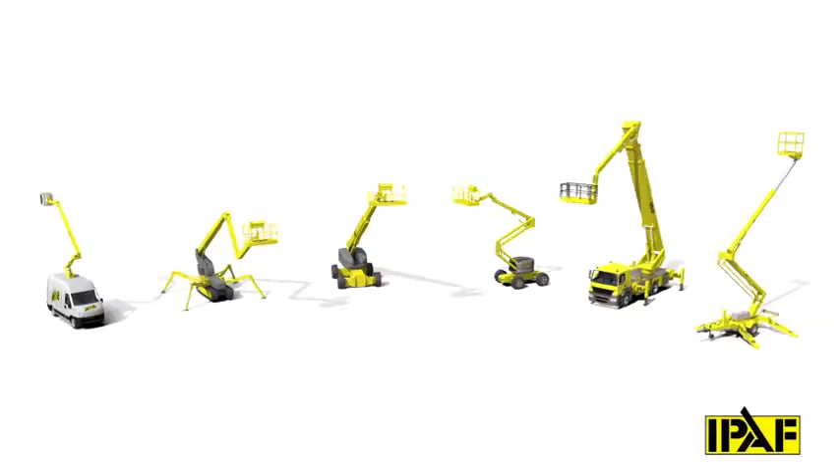This IPAF video explains how to carry out a pre-start inspection. This does not replace training and should be done by a trained operator who has either been familiarised with the unit or has been given time to self-familiarise. See the IPAF familiarisation statement and the employer-nominated person.

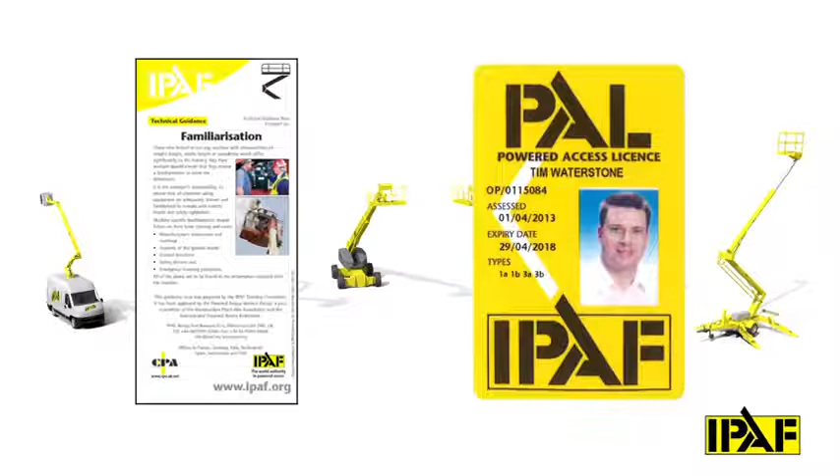All machines are different. Therefore, it is important to refer to the actual machine's operator's manual for machine specifics prior to use. The operator should be suitably dressed as per a risk assessment and/or specific site requirements. This might include the wearing of a hard hat, suitable footwear, gloves, goggles, etc.

Unless the risk assessment states otherwise, this must include personal fall protection, a full body harness and lanyard. For more information, see the IPAF harness statement at www.ipaf.org.

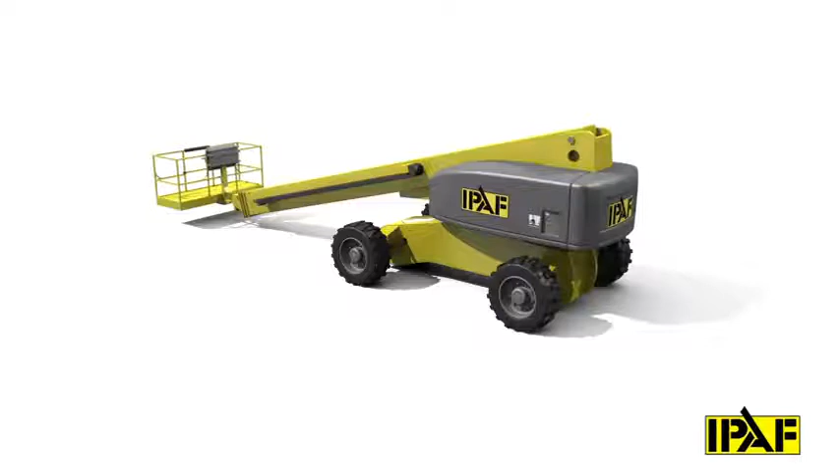Identify a safe place to do the pre-use checks away from other people, mobile machinery and vehicles, and without the risk of impact with overhead obstructions or power lines. Before work commences, only machines with proof of a current inspection should be used. Check the machine by following a logical order. There are checklists available as a reminder and instructions within the machine's operating manual.

Starting with the boom in the lowered position, working clockwise from ground controls, visually inspect the machine for damage, cracks, leaks, damaged or missing components, excessive wear and decal condition.

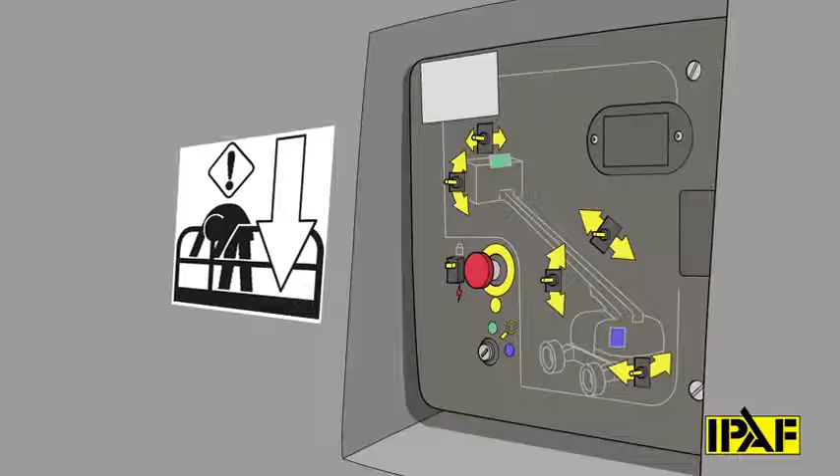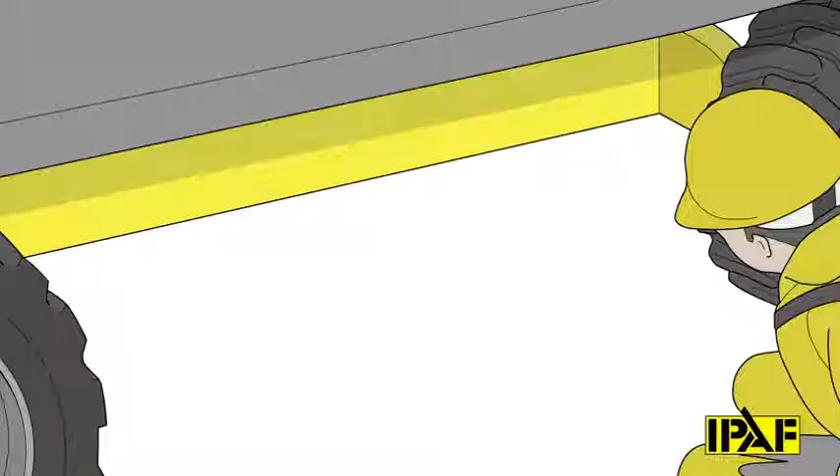Now check the machine does not function without the key. For example, this can be done by checking the key switch works and that the other controls do not work with the key in the off position or with the emergency stop in. Then, remove the key before proceeding with the inspection. Check the ground for oil under the machine. This can often be the first hint of a potential problem.

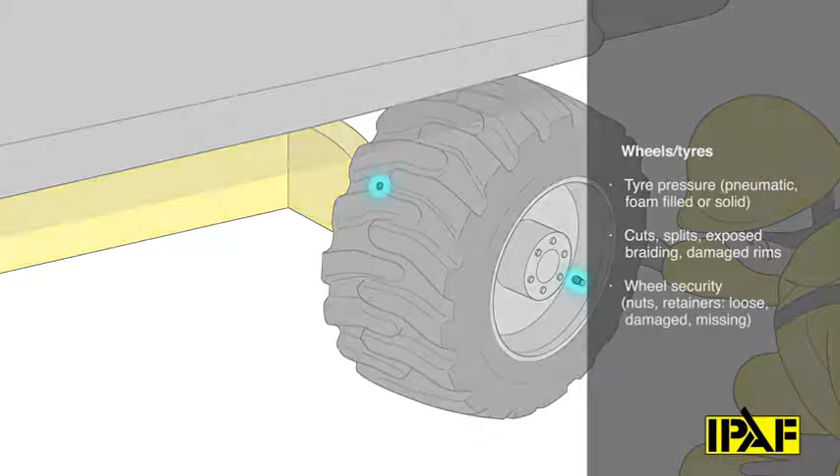Check the tyres, remembering that some solid or foam-filled tyres may have a bolt head showing opposite the valve. Check the tyre pressures on pneumatic tyres. Look for cuts, splits, exposed braiding and damage to tread or tyre wall. Look for cracked or damaged rims.

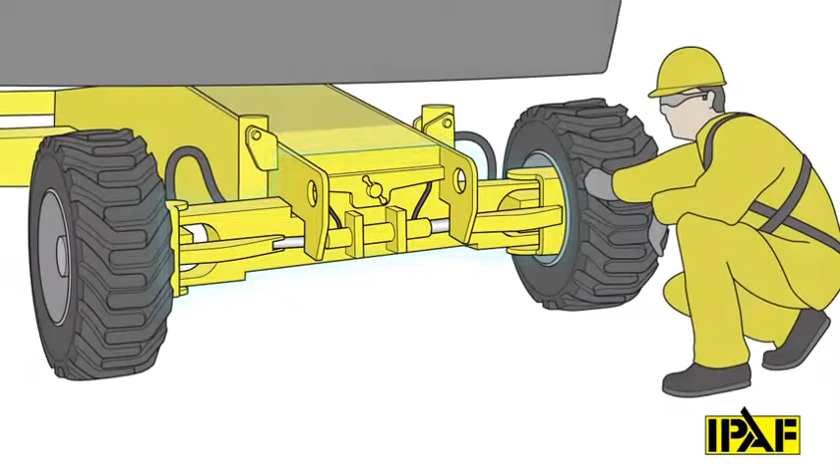Check wheel security by looking for loose, damaged or missing nuts or retainers. There should be no leaking either side of the wheel hub. Check for loose or bent components, pins and fasteners. Check wheel alignment and look for evidence of the wheels having been left in crab, four-wheel steer or two-wheel steer mode.

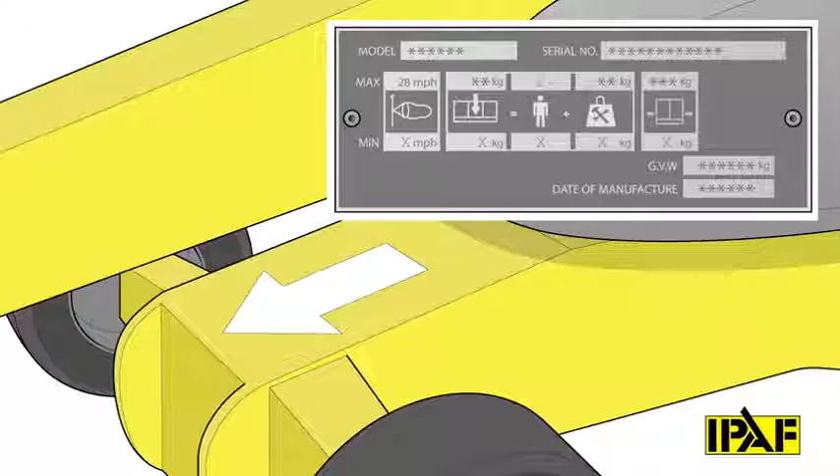Check the slew ring for missing teeth or damage and for excessive movement of boom. Also, has the slew lock been left engaged? Check the chassis decals and plate for important information, warnings and directional arrows. Ensure catches and hinges are functioning properly when raised and secure when closed.

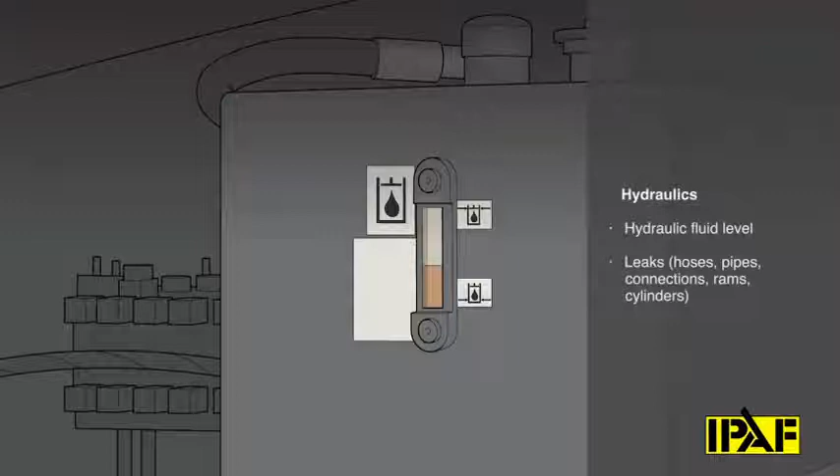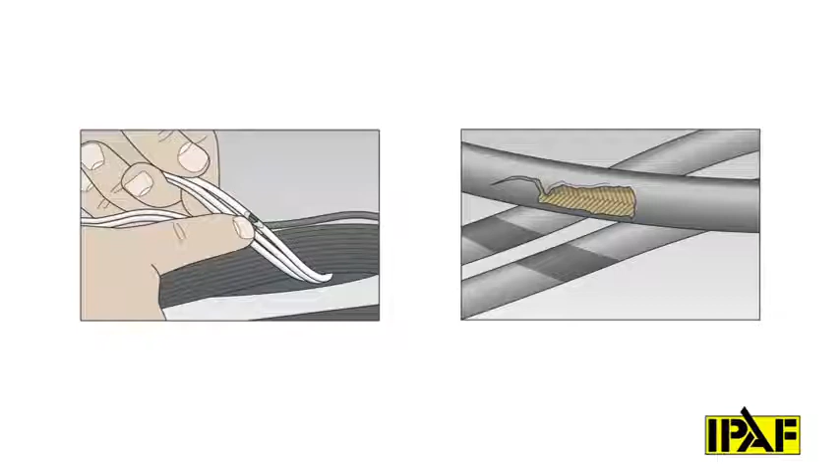Check the fuel level is sufficient for the day. Check the hydraulic oil level. When you do this, you must make sure that the boom is fully stowed. Visually check the hydraulic manifold for leaks. Check for loose, damaged or exposed wires. Check for damaged or leaking hoses.

If there is a slope warning device fitted and accessible, insert the key, turn to the ground controls and pull the stop out. Check this device for full free movement and function. Then remove the key and re-engage the stop.

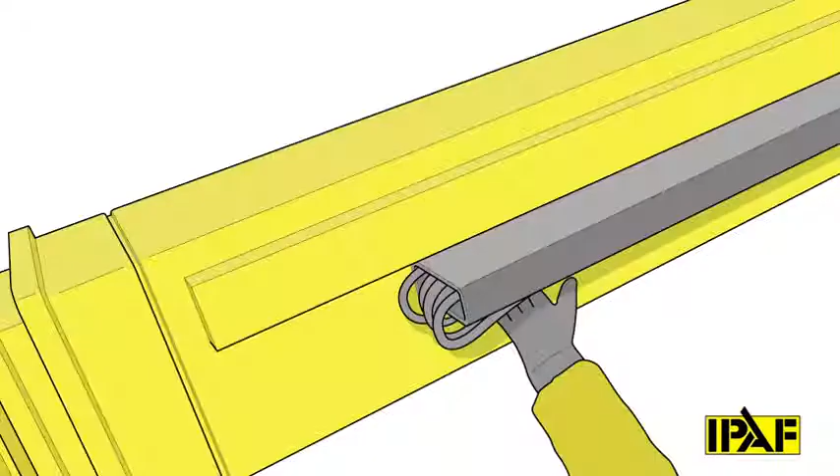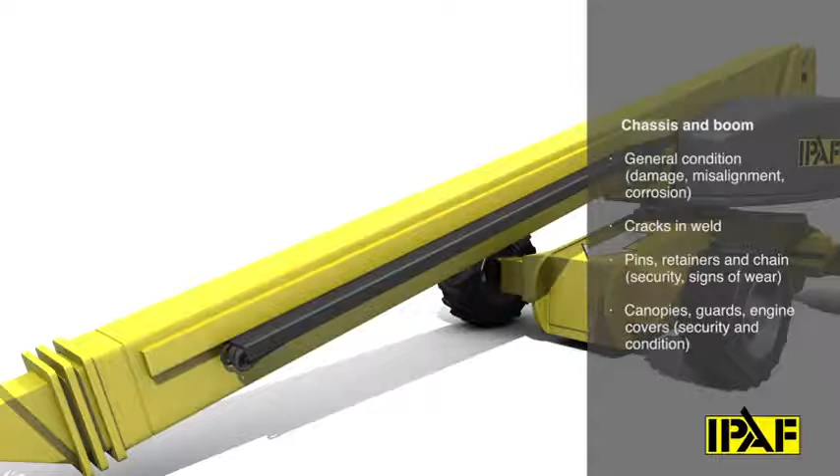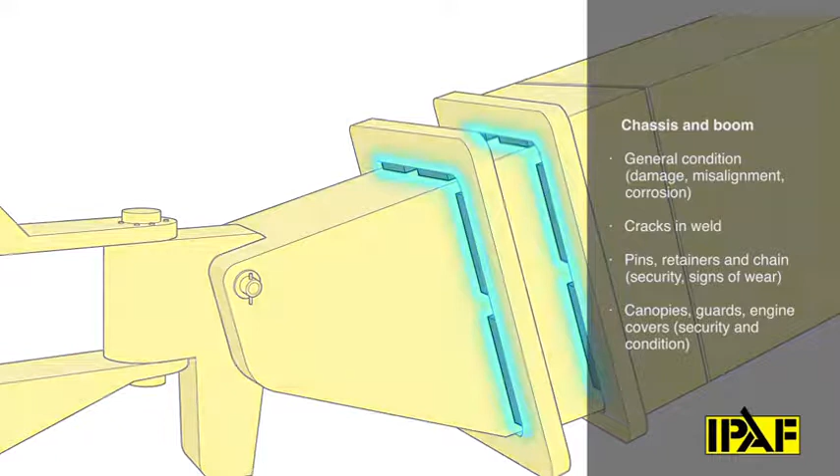Check the power track is securely attached to the boom and without damage to the tracking links and hoses and is free of debris. Check the booms for structural cracks, weld cracks, damage and misalignment. Check pivot pins and securing fasteners. Check the wear pads for excessive wear or missing pads.

Check for leaks, frayed or damaged hoses. Also do this around the base by the main ram later in the inspection. Check pins, bolts and fasteners. The basket should not show signs of structural damage or have cracked welds.

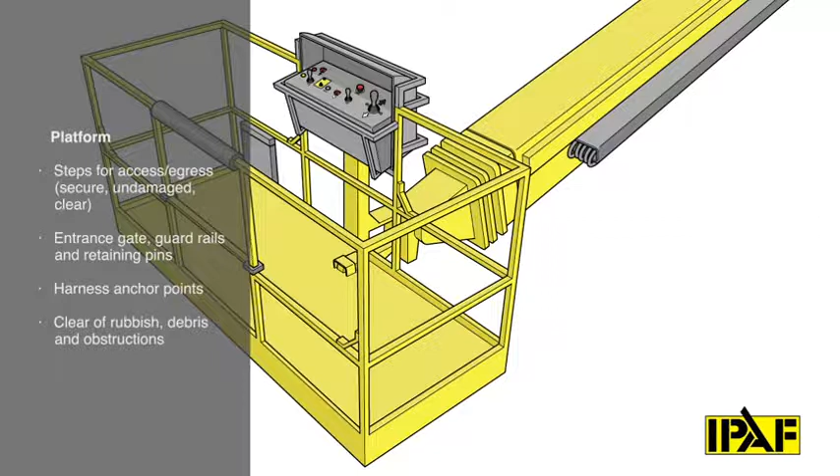Check that the decals are clear and readable, confirming safe working load, maximum persons and wind speed as you do so. Make sure that any gate opens either inwards or lifts upwards and that the gate or opening closes securely and has not been tied open.

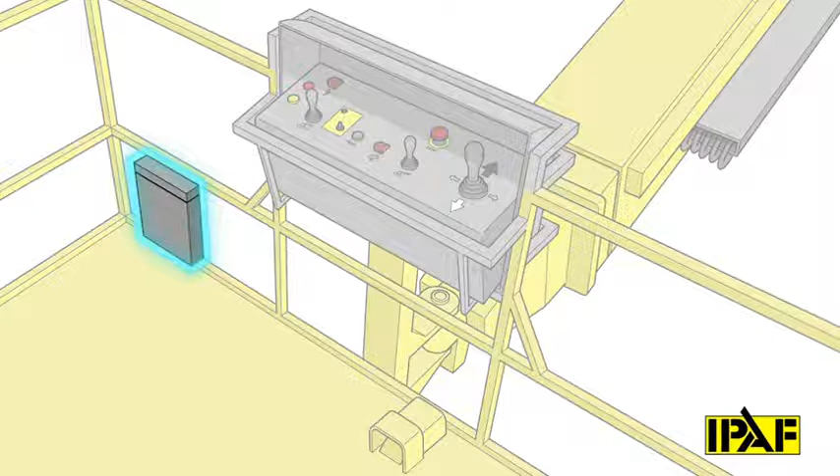Check the machine document holder for the Manual of Responsibility or Operator's Manual and make reference to it as required. Conduct checks to the wheel area as before. Check chassis base as before.

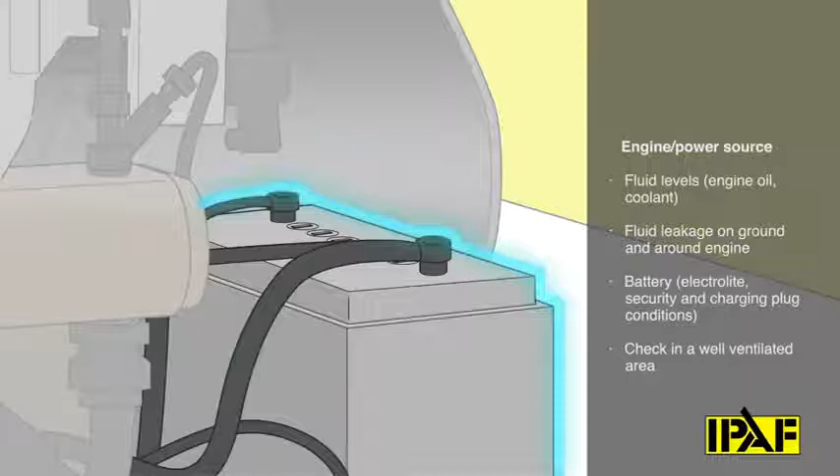Depending on whether you are using a diesel, electric, gas or dual fuel machine, you will need to do the appropriate checks. Check any radiator coolant level and hoses. Check the battery as detailed in the machine's operator's manual. Check for damage or leaking hoses and cables. Ensure catches and hinges are functioning properly when raised and secure when closed.

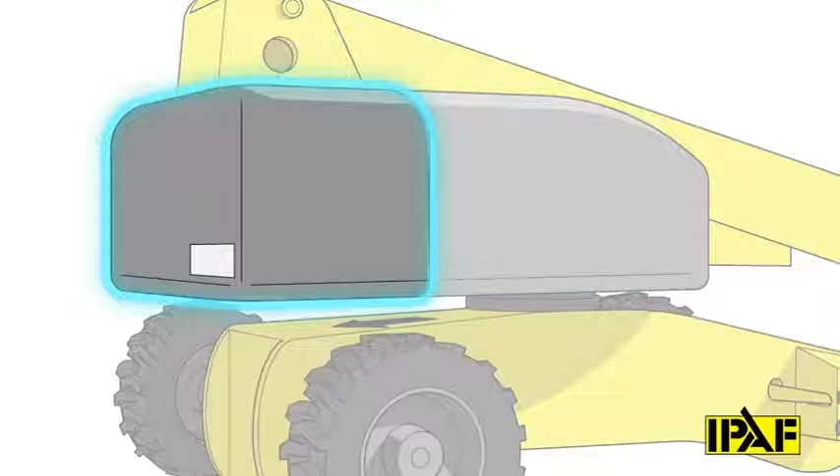Check the counterweight area for the condition of any decals, pins, limit switches, audio alarms and beacons. The ground controls decals should be clear and visible for each control. Insert key and turn to ground controls. Visually check around and above the machine for hazards and personnel who might be affected during the function checks.

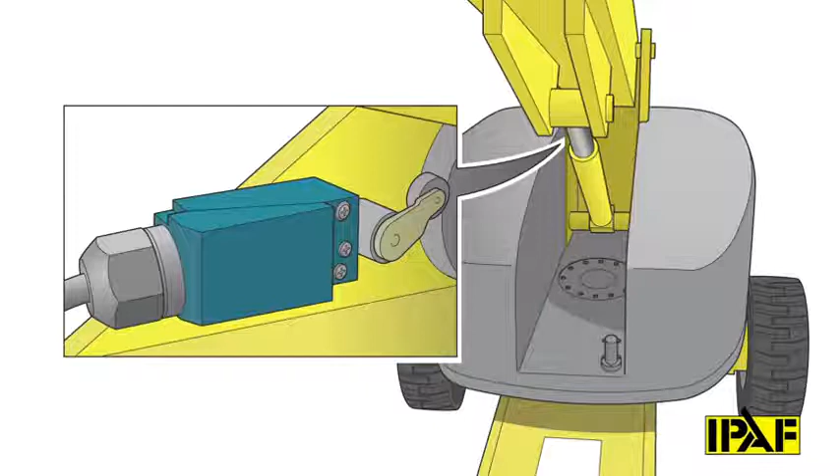Start the engine, elevate the primary boom to just above horizontal, and check that the emergency stop works. Then, leaving the emergency stop in, proceed to check the main ram and boom and chassis parts that were previously difficult to access with the boom down. Check for damage or leaks around the hoses, O-ring, pins and retainers, limit switches, structural bolts and welds.

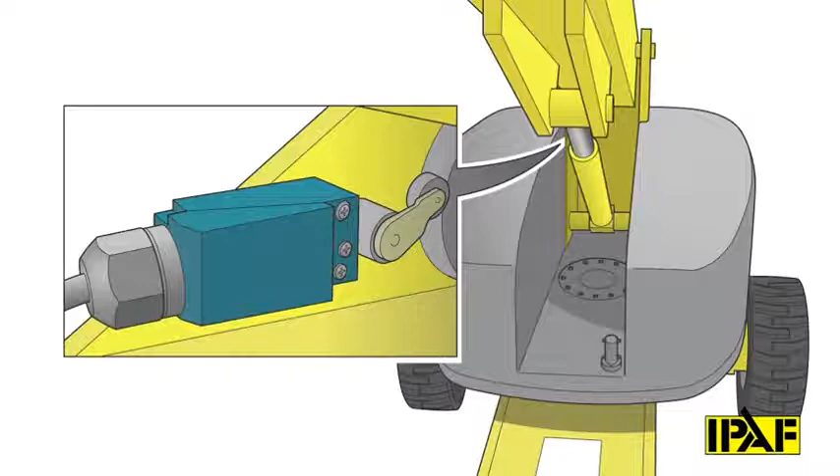When satisfied, return to the ground control function checks. Visually check again for hazards and personnel who might be affected. Check all functions, starting with auxiliary power or emergency lower to lower the machine. Then, restart the machine engine and function test the slew left and right, telescope out and in, basket slew left and right, and basket level up and down. Continue until all machine ground controls are checked and fully functional.

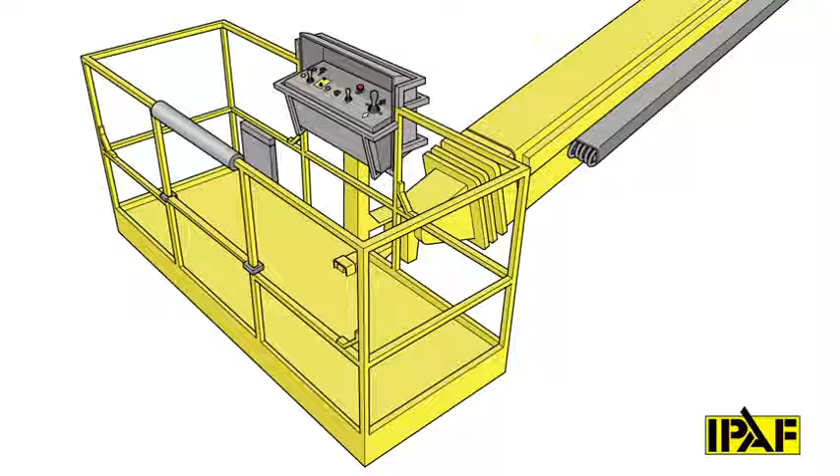Then, stop the engine, pull the emergency stop out, and turn the key to the platform control before proceeding to the platform controls function check. Use 3 points of contact for access to the platform through the platform gate. Attach and adjust the harness to one of the anchorage points provided. The platform controls decals should be clear and visible for each control. Ensure directional arrows match the chassis direction.

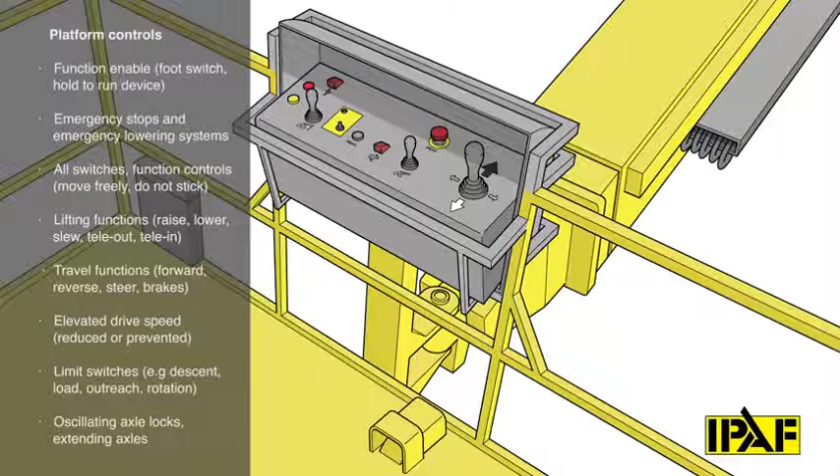Check the engine does not start with the stop in. Then, start the engine. Check that the function enable works. This is sometimes foot operated and sometimes hand operated. By moving short distances, check the working of the drive, forwards and backwards, steer, left and right, and brakes. The drive should be in high speed with the boom in the lowered position. Check other steering modes.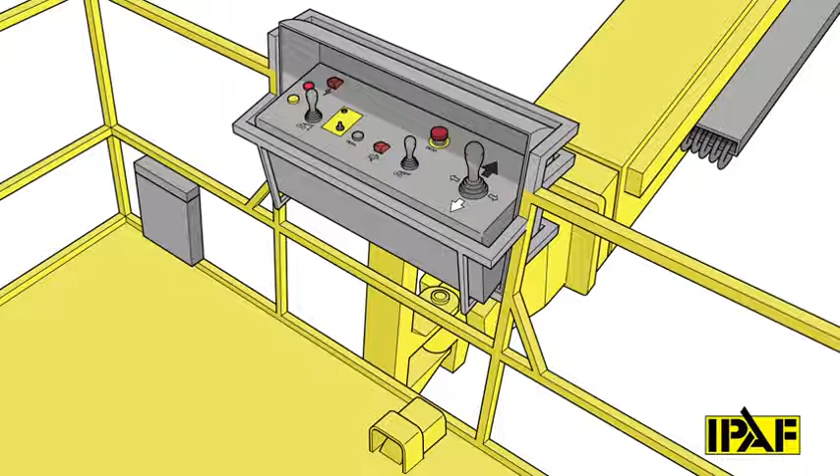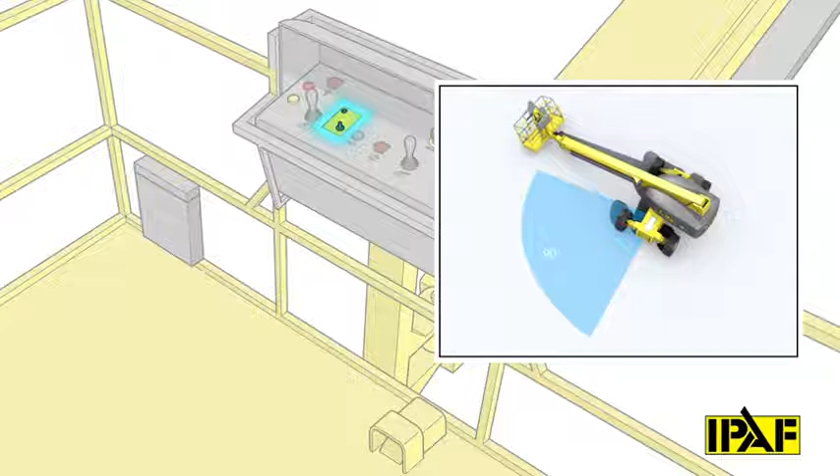Check for overhead hazards and then lift the primary boom just above the horizontal and check the elevated drive speed is functional. Stop the engine and check the auxiliary power or emergency lower controls. Then restart the engine and check all boom functions, remembering to always look in the direction of travel prior to movement. When the boom is slewed around, check the function of the warning and drive enable functions. Check the basket rotate and level functions.

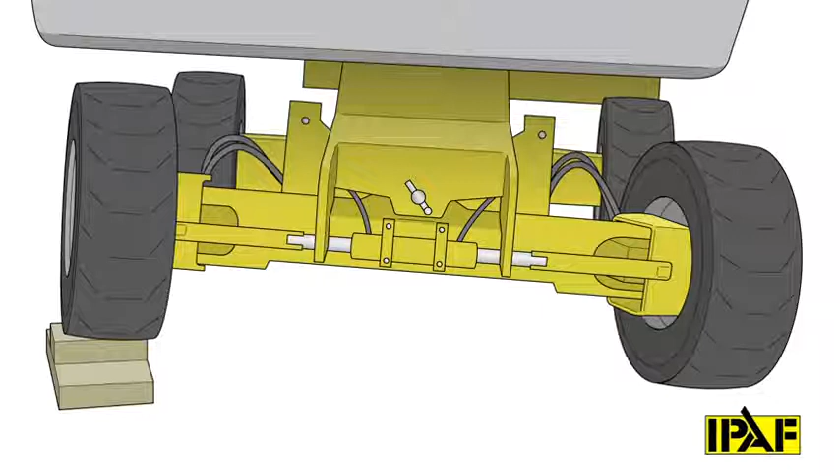Where oscillating axles are fitted, drive the boom onto a test gradient as per the manufacturer's manual. Check that the oscillating axles are functional and that the wheels remain in contact with the ground. Once satisfied, park the machine on firm, level ground.

Having completed the visual and function tests, the machine should be safe to use. Don't forget to document that you have done the checks. Always refer to the manufacturer's manual for specific machine details. If any defects are encountered, stop the machine, isolate, tag, and report to your supervisor.